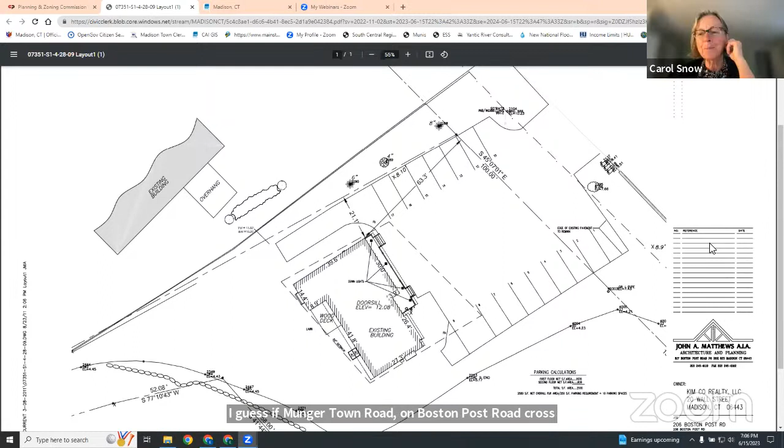Share your site plan. Is everyone familiar with where this particular property is located? Almost diagonally southeast of Mungertown Road on Boston Post Road, across from the car wash. Existing paving in the front and office building, with tidal wetlands at the rear of the property. Okay, so that's Boston Post Road to the upper right, correct? This is Boston Post Road here. Right, the car dealership would be up even further north across the street. Okay, and this is set back. There's one additional office building, and this is the shopping plaza, correct? Yes, next door, and this is the bank drive-through.

Do you need the plan up for your question, Kara? Sorry, no, I was just going to ask if Craig wanted to add anything more about the description of the building or the changes to the building or the land. Not really, it's everything, it would be done inside. I have two entrances currently, and that's going to remain the same. So there's really not much change that's going to take place.

So I'm going to put your floor plan up, Craig, and perhaps you can walk us through specifically what you're doing. You're before us for both a special exception and a coastal site plan application. The application was referred to DEEP for comments because of the coastal application. One question raised in the letter from DEEP was whether or not the renovations you were proposing would constitute a substantial improvement under the floodplain ordinance, requiring the entire structure to be brought into current flood compliance. I believe the current value of the structure is in the 200,000 range. Have you done a cost analysis of what your renovations will be?

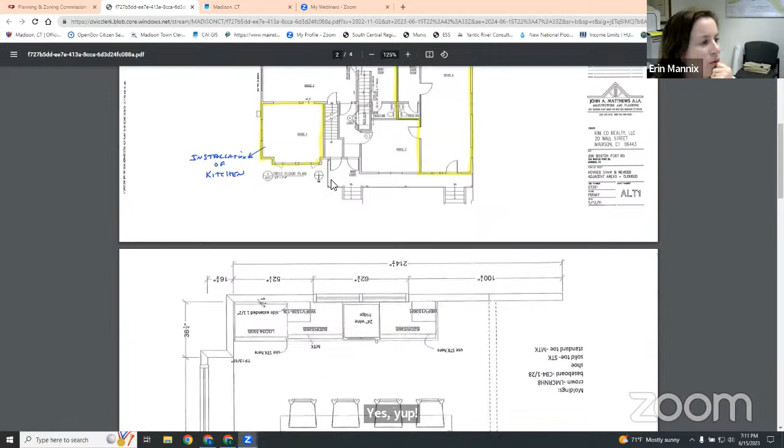So Erin, if you scroll down we'll see images too of the proposed kitchen—yes, this is just the layout of that one space of how the kitchen would be. And that's this room here. So this additional room here is part of the residence?

I'm using that for an office. Okay, so it's commercial use perhaps. Yes, perhaps a cleaner floor plan that can clearly show the commission which space is which, and a breakdown of that floor cost associated, just to verify that. Okay, I can do that.

The other points I wanted to raise were the need for a B100A application with the health department to verify, because it is a change of use, septic capacity and adequate reserve area. The second would be compliance with the building code and fire code for change of use, and whether there were separation requirements or sprinkler requirements. Has that been something you've reached out to those departments for? No, not at all.

I will. Aside from other questions the commission may raise, it would be my recommendation to gather that information and come back to the commission, just to make sure this is feasible under the parameters of the regulations.

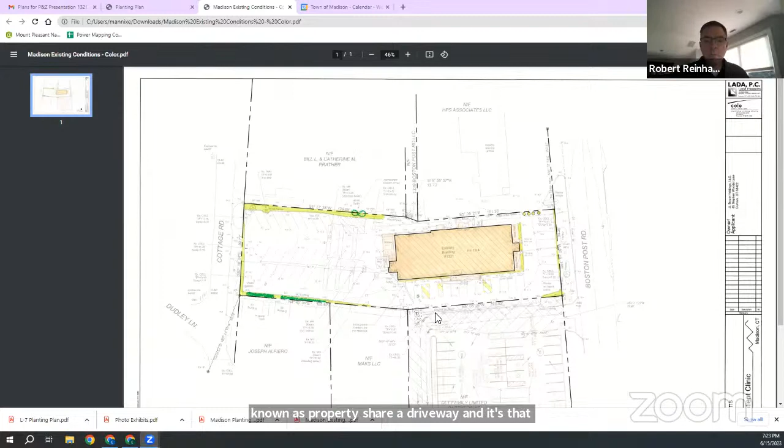When the property was originally developed in the mid-'80s, it was all subdivided out. This was part of the property that the Dunkin' Donuts is on. So those two properties, our property and the Dunkin' Donuts property, share a driveway. And it's that driveway right there. We have that all that cross hatching is an easement that is granted to this site for access over and across and through the Dunkin' Donuts site. And it's always been this way.

The proposal that we are making is to not change the building whatsoever. The building doesn't move. The building is fixed. We're not proposing any exterior changes to the building.

But what this plan does show is we have parking currently along the west side of the building. We have parking along the south side of the building, which is near the road. And there are two building entrances on that south side. That little projection that sticks off the building, that's currently an access that uses stairs, 3 steps to gain access to the door. And then on the west side of the building, right there where there's a light tan color, there is a main doorway and then a stair and a ramp that provides access.

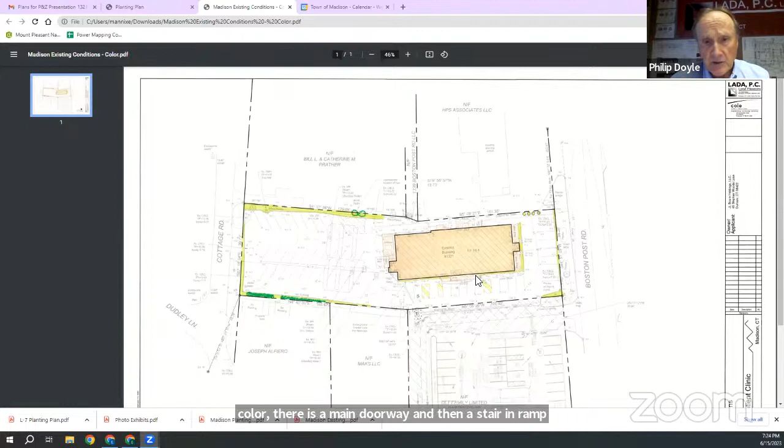The majority of the parking is to the rear of the site, and it's in the rear of the site where the septic system is located. There's about 48 parking spaces on the property. And ultimately, when we start talking about the site plan, we're proposing to reduce the amount of parking to 42 spaces. That's what would be necessary for this particular use, one parking space for every 250 square feet, equal to normal office use.

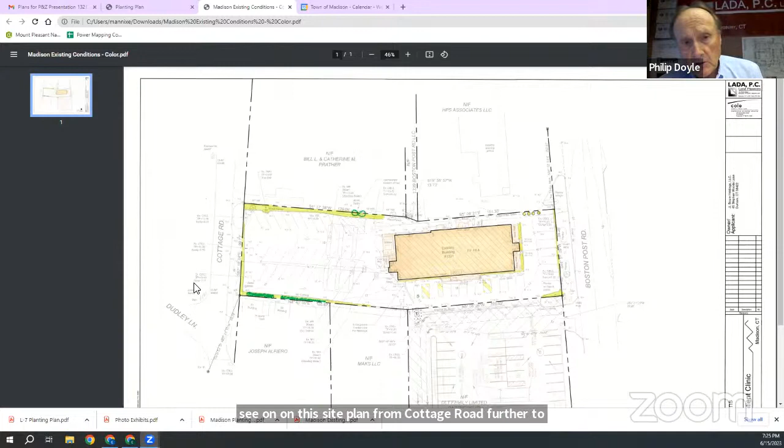The entire block, we were talking to the Community Advisory Committee the other night, and a question had come up about zoning in this area. And it's interesting, but this entire block is zoned C. Everything around us, all the properties that you can see on this site plan. From Cottage Road further to the north, all of the land in that area is zoned T, the transition zone. So this area has been used for business.

Currently, I would also mention there, it seems that there was at one point in the past light poles in the parking lot. Those look like they have been removed at some point. And the lighting that does happen on this property at the moment is all via floodlights that spread light wherever they are needed, mounted to the building.

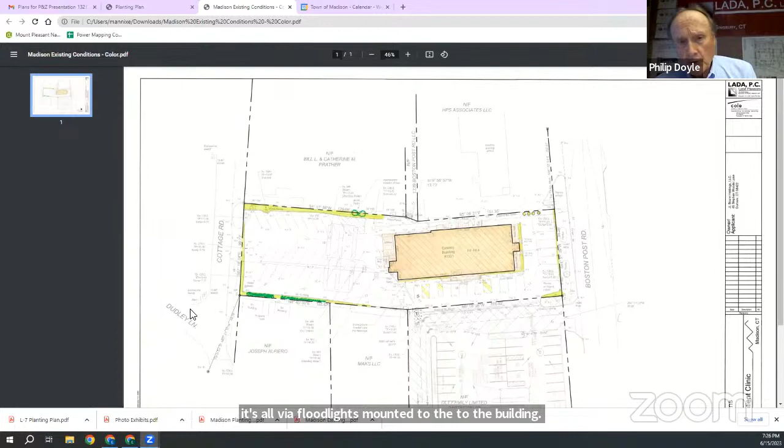Do you think you could flip to the proposed plan, Erin? Yes. Do you want the L7 planting plan? The colored one, yeah, the red color rendered one. Got it. Here we go.

Yeah, this gives you a good schematic picture of what we are proposing, we're trying to improve the site. The parking up towards the street would remain where it is. I'd like Jennifer to be able to explain her business in a couple of seconds, but before she did, I wanted to give you a brief picture of the property.

That southerly entrance that's toward Boston Post Road, that little nib that sticks out, that will be the entrance, if you approve this project, for cats, small animals. And the western entrance will be the entrance for dogs, keeping them separate.

Neither entrance at the moment has acceptable access for handicap. We are proposing, just to the left of your cursor, Erin, we are building a new handicap accessible ramp for the dog entrance. And towards the southern corner of the building, we'll be building a new ramp that does not exist to gain access for patients bringing cats in.

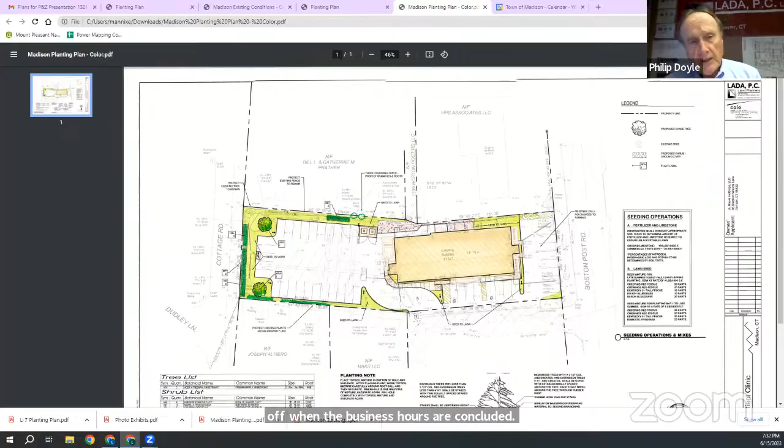But before I go any further, I think Jennifer should explain what she's doing.

We're asking for a special permit. There are certain conditions under section 615(5) for a veterinary outpatient clinic - the business has to be conducted entirely inside a building, all mechanical equipment enclosed so there's no noise from animal activity. Other conditions include no outside dog runs and no long-term boarding. We believe this application meets all of those conditions, but I think Jennifer should explain her intent.

Hi, nice to meet you all. I'm Dr. Jennifer Lansdowne from 1321 Boston Post Road. I'm co-owner of the building with my husband as JL Bore Holdings, and we're hoping to put into it an outpatient veterinary clinic that I co-own with Dr. Carolyn Gross, also a veterinarian - I'm a surgery specialist, she's a medicine specialist. Our goal with this facility is to run an outpatient clinic, open 8 a.m. to 6 p.m. We'll see emergencies of our own clients during those hours, but we have a very good relationship with Central Hospital for Veterinary Medicine, specifically the emergency clinic in Guilford.

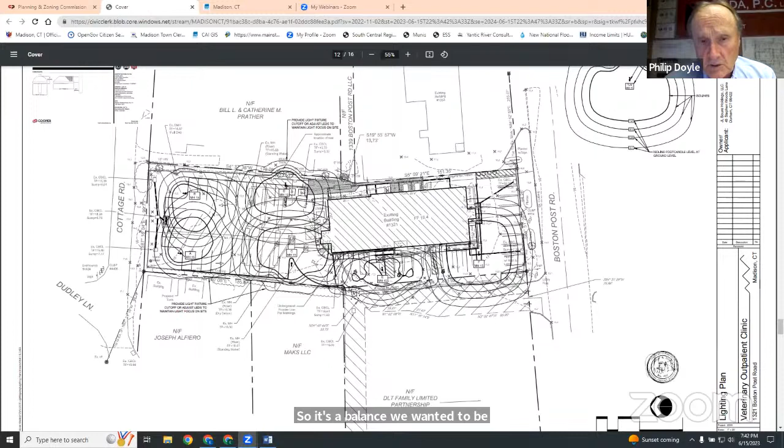So it's a balance. We want it to be safe, and we committed to the advisory committee that the lights would not be on after the close of business. If Jennifer's practice closes at 6, and she stays around till 7 or 7:30, I imagine at the latest the lights would be turned off, but the lights can all be set on timers. The issue is wintertime, right around Christmas, that's when it's darkest. So if the lights are off by 6:30 or 7, or at worst 7:30 or 8, that's the extreme case. This time of year, the lights would probably never come on.

My reaction is it's a concern - it's my thought. It's obviously been well addressed, and it's certainly... I know the property very well, and I think you've done a marvelous job improving the property, so I don't mean it as a negative thought. It's just that I know that area can be a real pain in the neck after the fact. It looks like you've addressed it, and I certainly would support that you have addressed it. If we can lower it to 12 feet, my answer is yeah, if we do more. But again, it's not a showstopper - it's just a comment that that's one of the areas, that much lighting in that back area. And I agree, floodlights are a pain in the neck because they just light up everything.

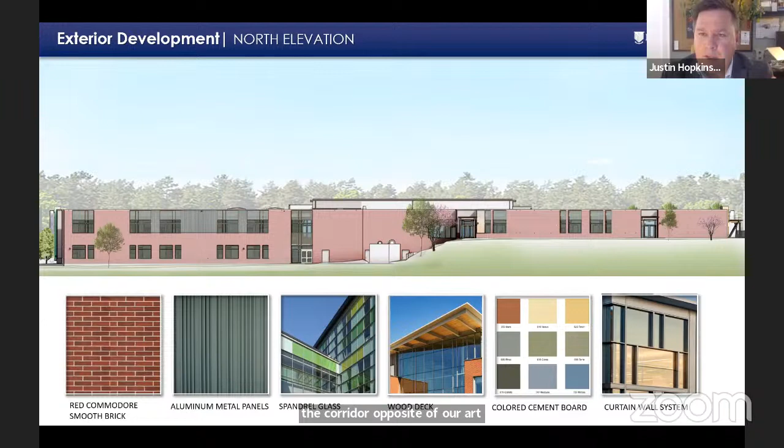The north elevation is basically on the other side of the building, where our parent pickup and drop-off would be. One distinction you'll see in the update for the next meeting is we're incorporating, per some comments from our building committee, glazing along the corridor opposite our art classroom to get in some indirect northern light, which is good for those particular places.

East elevation—this is the downslope elevation of the two-story space. Again primarily brick, where we're popping out some areas to accent the overall facade, with entrances at each learning community, as shown in the floor plan.

The west elevation is the kindergarten and pre-kindergarten area, directly adjacent to the playscape, with a similar architectural language. We will be providing exterior canopies near the playscape along the facade to provide additional shade and shelter for students in that area.

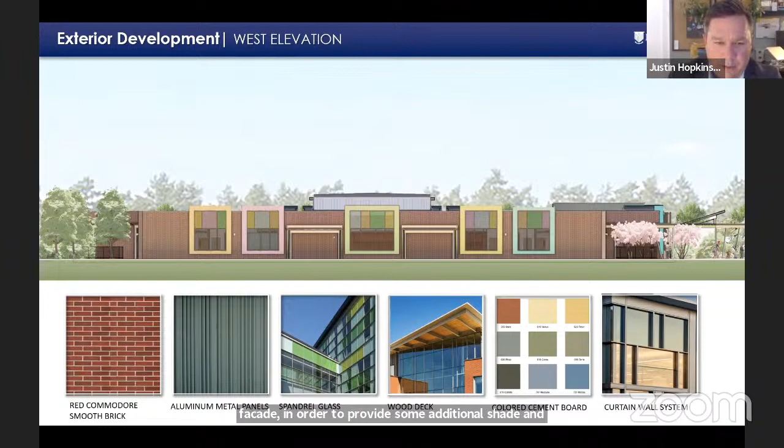This was one of our earlier renderings. The one item I want to highlight here is there has been considerable discussion of the canopy. We've had differing opinions on the nature of our entrance canopy, both with our partners at the building committee and during the presentation at ACA. We think we have a good solution that I'll go over in a moment.

This is at the downhill side, looking into the cafeteria. The main entrance is over to the left, on the uphill side near pickup and drop-off. This is another view from the uphill side, looking down to the two-story space.

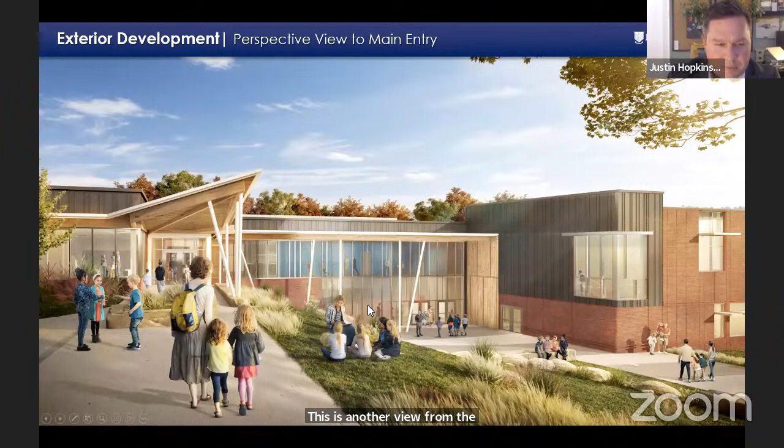This was a request from ACA, to show a rendering of the visual impact of the building from the street. This would be at the south entrance to the building. Another item I'd like to bring up is the sign, which was also a subject for discussion at ACA.

Overhead bird's-eye view showing how the volumes knit together here. You'll see the K and pre-K playscape over to the left, and the remainder of the building.

One thing I should mention—this is probably a good image to show it—in addition to the geothermal well field, we are providing the majority of our air handling units on the interior of the building. The purpose is to free up roof space to allow for a photovoltaic array on most of the roof. Without significant air handling units, condensing units, and similar equipment, we can use most of the roof, save for a couple of necessary vents for bathroom ventilation, etc. We can have the building be PV-ready as part of the building committee's ongoing work.

One of the things we're looking at, and will be vetting with the building committee at our meeting on Tuesday, and finalizing for our next session since this hearing will be continued to the July meeting. We intend to finalize this recommendation, bringing in some of the language. You may recognize some of the images at Hammonasset State Beach, drawing from the vernacular in town and using it as an homage in our structural systems for the canopy. We think this solution is a marriage of the two concerns and meets the intent of the ACA recommendation, while giving us a strong argument with our building committee partners. So stay tuned on that. We'd welcome any feedback or comments as we get into the comment section.

The other thing brought up at ACA: we had shown two monument signs at the main entrance to the building. This one represents what I believe is allowable per your signage regulations, and we also looked at a larger ground-mounted monument sign that incorporates some of the building materials. I believe it was a recommendation from ACA to pursue the larger sign and possibly seek a variance for the sign size.

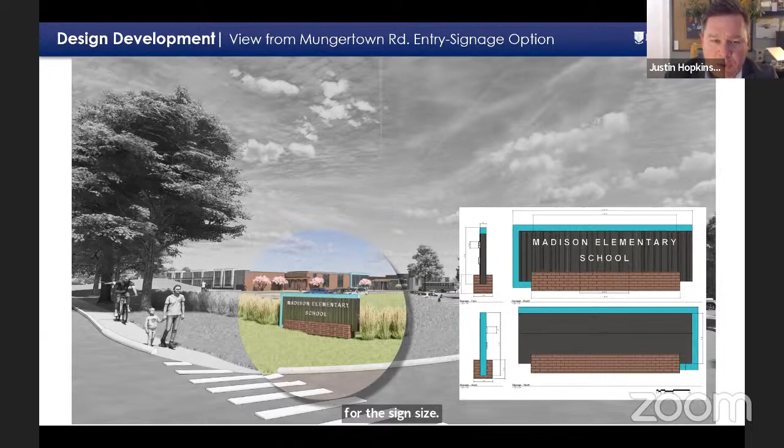With that, I believe that concludes the architectural portion of the presentation. I know we have a lot of speakers, so let me know, would you like us to take questions on this portion now, or get through the entire presentation and take questions at the end? I'd be happy to go through the entire presentation if other commissioners are okay with that. Okay, great, thank you.

So Will, I believe it's you. You're muted. It's his first Zoom meeting, so grant him a little clemency here.

Thanks, Justin. For the record, Wil Walter, professional engineer with Alfred Benesch & Company. How we're going to present the site: I'm going to go first and talk about some of the site layout, as well as stormwater, utilities, and erosion control. Then I'll turn it over to Ryan Dean, who's going to talk about landscaping and placemaking on site. After that, Chris Van Zanten, our professional traffic engineer, will talk about the traffic impacts as a part of this project. So with that, let me share my screen.

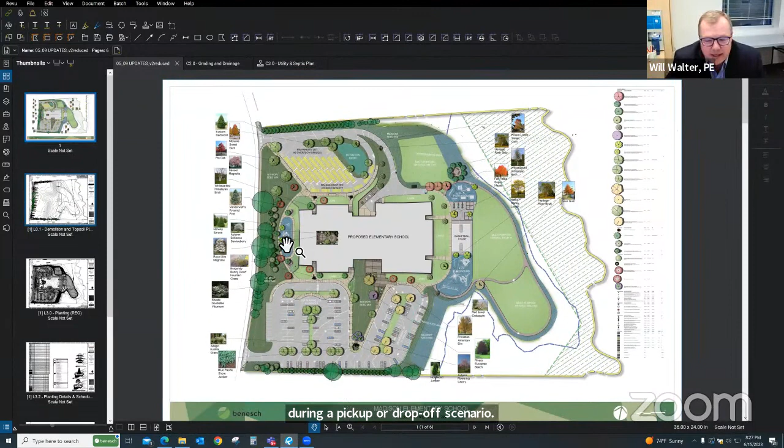Another important thing was parking. The building committee felt very strongly that we needed to maximize the parking. We need about 125 spaces for staff and visitors, but also for those few nights in the year with community events or school events. So what we're providing is 186 parking spaces down here, and as Justin mentioned, about 45 overflow spaces up here. So we've got around 230 spaces, significantly more than required on a daily basis, but additional spaces for those few times during the year that it's required.

The third thing that was very, very important was the parent queue space for drop-off and pickup.

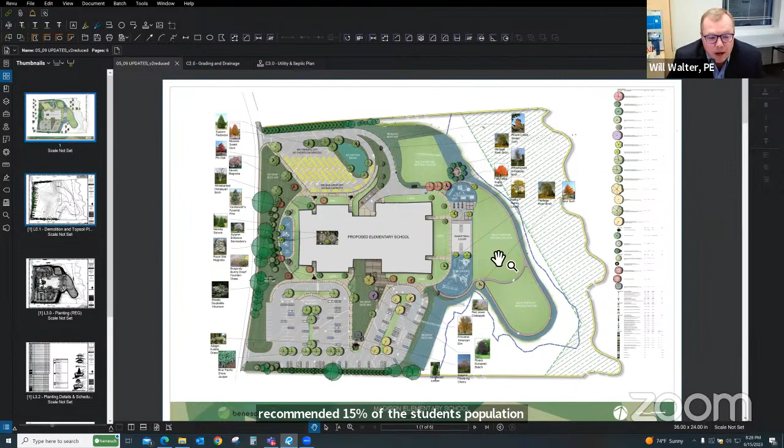One of the concerns of the neighbors was we really don't want to have buses, and we don't want to have cars backed up out here during pickup and drop-off. A previous traffic study was done, and they recommended 15% of the student population for parent queue, so that would be about 100 cars to be able to queue.

We did our own independent assessment, and Chris will get into this when he goes. We determined that you'll probably need about 90 spaces, but in terms of the amount of spaces that parents can queue up around, as well as the additional spaces they'll be able to park up here, we're providing 117 combined spaces. That's 17 more than was proposed by the previous traffic engineer and 27 more than we feel will be appropriate. We've worked very hard to maximize the amount of parent cars that can get into the site, and we're confident there's not going to be any cars backed up out here during those operations. Chris will speak more to that.

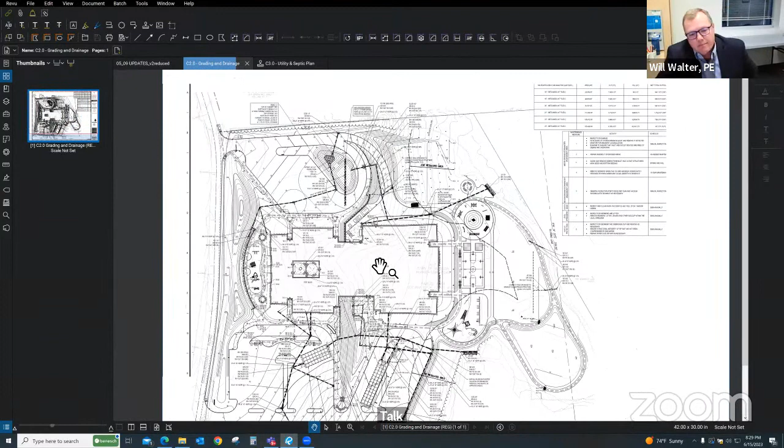I'll talk a little bit about grading and drainage. To the right down here is the Neck River, running north-south in the eastern portion of the property. There's wetlands associated with this, and we've presented before the Wetlands Commission, and we're going to go back before them again in July. But in addition to the wetlands, there's also a floodplain that comes down through here.

As a part of the local floodplain regulations, as well as the state floodplain regulations, we need to get through the local flood ordinance and flood management certificate, which is a state DEP permit. We have to set the finished floor elevation a foot above the 500-year floodplain, which means the lower side of the building is filling within the floodplain. We're required to do that by the regulations.

But the local and state regulations require that within the 500-year floodplain, we have to provide zero net fill. And not only zero net fill up to the 500, but for every incremental foot starting at the limit of our disturbance up to the floodplain, each of those 1-foot increments has to be zero net fill.

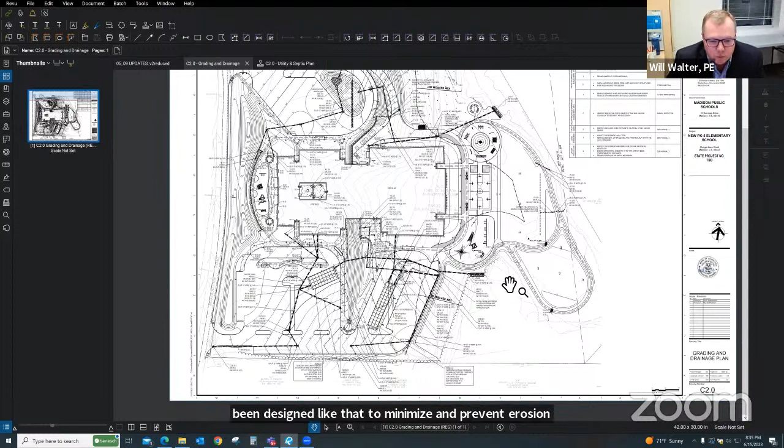The other thing I'll mention about the stormwater system is we have a large septic system up top that I'll get into in a second. But it was important that as part of that septic system design, we had underground infiltration, so that as the septic effluent slowly migrated down towards the wetlands, the stormwater would be infiltrating and helping to dilute the nitrogen concentration of that septic effluent.

So let me move right to that, and I'll talk about the utilities on site. The first thing I want to talk about is the water main extension. Under existing conditions, there are no public water mains out here.

What we're doing is we've designed about a half-mile water main extension. There's a water main up near the middle school, I believe, so we've worked with Connecticut Water. We've designed an extension of a 12-inch main all the way down Green Hill. It takes a left on Mungertown.

Originally, we were going to stop it right here, but the fire marshal is requiring us to put 2 fire hydrants on site, one up here and one way down by the southern entrance. Connecticut Water will not allow a fire protection lateral through the site, requiring that it come directly from the main. So we've had to extend the main down to here.

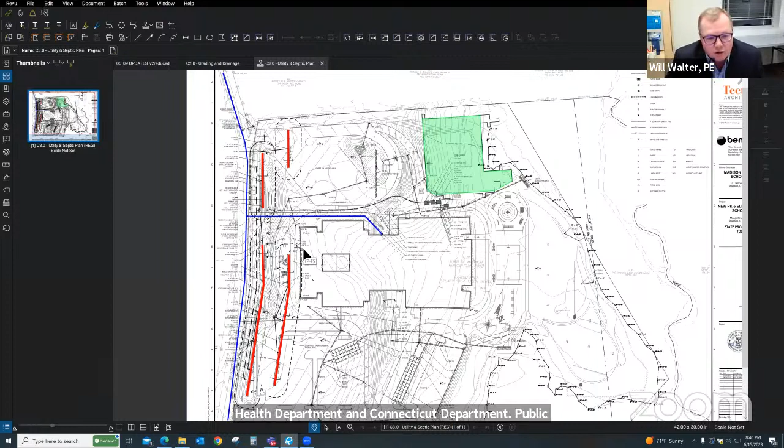We've been working on this design with the local health department and the Connecticut Department of Public Health. We were out there last fall, did test pits and perc tests. It's fully designed, and we've answered all the comments from the local health department. Now it's being reviewed by the Connecticut Department of Public Health — they were out there when we did the test pits. We've received their comments, which in my opinion are relatively minor. We've been revising the plans and anticipate submitting our revised design, which doesn't change anything you see here, probably Monday. I feel like we're very close to approval for the septic system from both the local health department and the Connecticut Department of Public Health, which will satisfy all the regulatory agencies that review the septic system.

So I know that's probably more information than you wanted, but I felt it was important to give you a sense of where we're at with that septic system. And that is going to conclude my presentation.

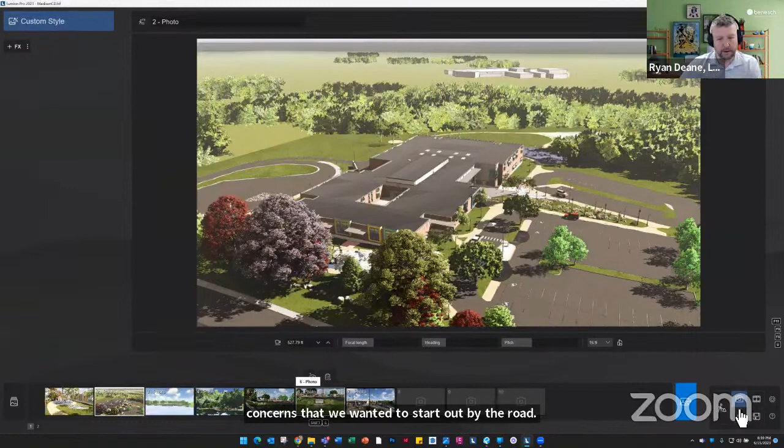One of the main concerns we wanted to start out by the road was what was going to happen with that buffer. Will just spoke about the sanitary line, but the biggest part of that was we're going to cut into a lot of the roots, so we were really diligent about trying to get as many trees saved as possible.

So we went out in the field and surveyed every individual tree, marked it for whether it survives or has to go, and from there we worked around that.

Within that area along the road, that's where we're housing the little guys' playground. The pre-K playground is nestled up next to the building, but there's a natural berm there that exists that we're going to keep.

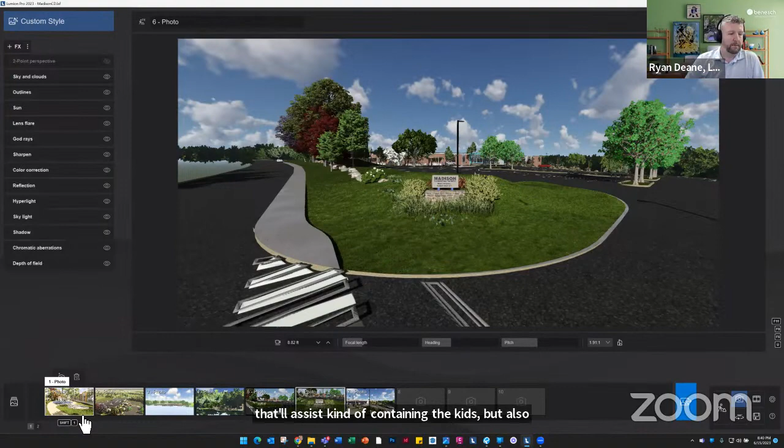I've got a great shot of it here, with some plantings that'll assist in containing the kids but also screening the views from the road. So this is that view, with the berm between the road and the playground. There's actually going to be a fence incorporated here. This is that building elevation shown earlier, but this is more of a run-and-play, natural feel, with lighter colors for the younger kids.

And then there's a darker palette of playground materials, which I can show you right now. So this is the...

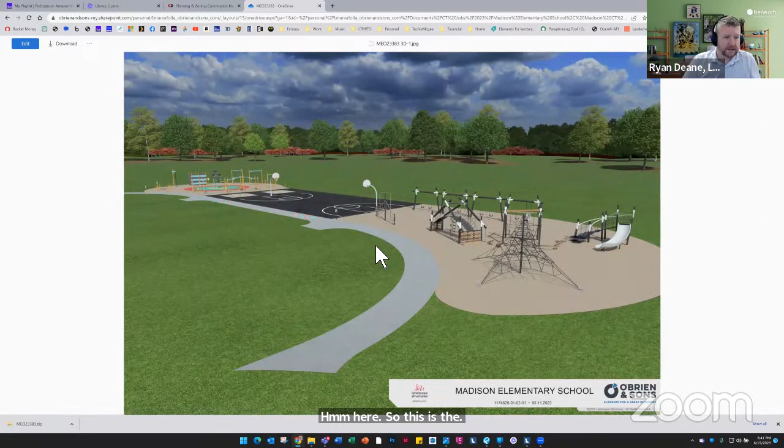Okay, so the upper school playground is broken into two portions. It's all newer playground equipment with a darker, more sleek scheme with a white pop, and there's going to be little elements of color within each of these. Some of the hardware we may change and make a little more fun.

But the alternate, moving a little bit further north, there's going to be a playground or basketball court with the ability to do Foursquare, things of that nature. As an add alternate, there's another playground area that could be added for kind of splitting the 1 through 5 children.

But the reality is there's plenty of play space through the fields. With the fields down to the south, to the southeast, we're going to have an upper field with more of a lawn.

Hopes to have that as the athletic field. Same with maybe the upper field area, but maybe the lower basin area could be more agrarian, mowed less often, with hopes to get some wildflower mixes in there.

Moving on, the other thing we're trying to do is reinforce that shoreline feel by adding some wood elements that are on the building as well, pulling that aesthetic up to the building with the pedestrian lights. These would be the little 3-footers along the pathways, and then throughout the periphery closer to the building would be these shepherd's hooks. And then out in the parking lots, something more efficient, an 18 to 24-foot height pole.

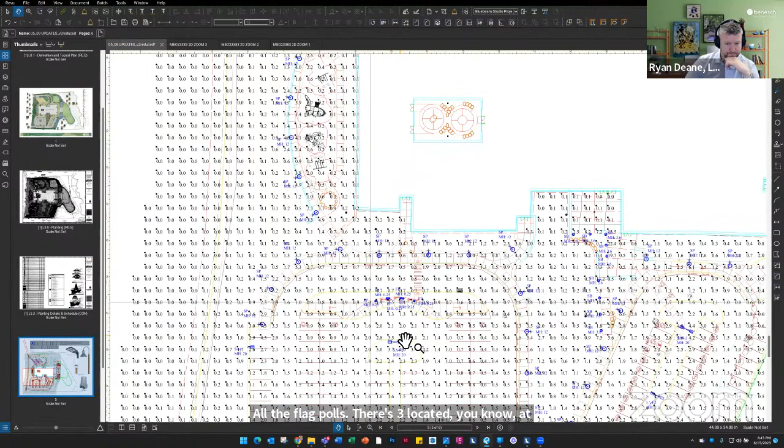All the flag poles, there's 3 located at the upper drop-off area. Those are all lit to the town standard flag lighting, downlit, just because of this pole topper you see on the corner of the screen here.

Beyond that, the plant list that we got into with the commission, very happy, there were only 2 or 3 plants that we deviated from. Again, these old green trees represent the existing buffer that's going to remain. It was harder to do with some of the lesser vegetation, we'll call it, there's a lot of disease stuff.

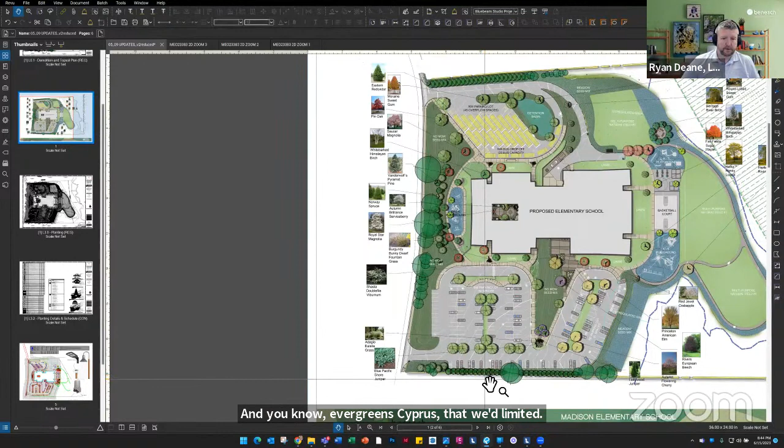So we're trying to replace that with hedgerows of evergreens and things of that nature that are all native. We've got eastern red cedar at the top. Previously we had a cypress that we omitted, and then at the bottom we've got more, I think it's more of the cedar.

And all sorts of different plants throughout, making sure that they've got winter interest for kids. Also that they're not going to be toxic plants - somebody's going to eat a berry and go right to the emergency room, that's not an option. So, also some maybe butterfly garden interest plants along this no-mow seed mix meadow.

Which has a real opportunity for pollination and learning opportunities for the kids. With that, there's an opportunity for this learning path that kind of roams throughout the lower portion of the site, connected to nature with outdoor classroom opportunities. We're just thinking stumps with rocks, a little bit of a canopy of trees, and a place for a class of 12 kids to sit and read, and just kind of get outside and explore.

I think with that, I've covered most of the site. If there's any questions, I'm happy to answer them. Thanks.

So Will, sorry, this is Justin from Tecton. Will, you mentioned you want to pick it up for traffic here?

Great, thanks Chris.

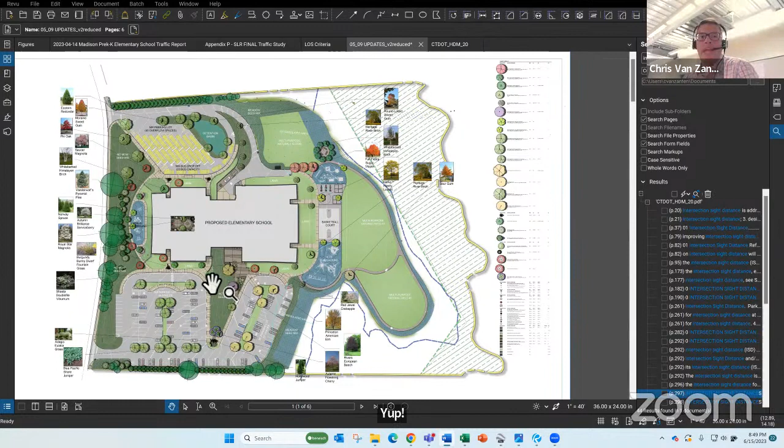So one of the first things we dug into when we got involved with the site planning is we took an independent review of the traffic study that was performed by SLR, dated January 13th, 2022. We dug into that, and based on feedback we got from other meetings, as well as based on the proximity of the existing school, the proximity of the intersection of Green Hill Road and Mungertown Road to the new school, as well as the existing schools, the Daniel Hand and Polson Middle School, we thought it appropriate to perform new counts at that intersection.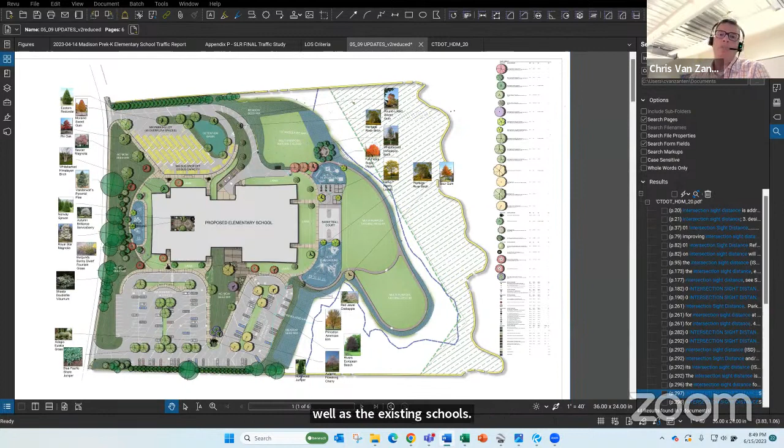And we went out there recently, March 21st, 2023, and performed traffic counts during the morning peak and the afternoon peak. One of the key findings we got from that is those were check counts that we wanted to use to verify the data that was collected by the SLR study.

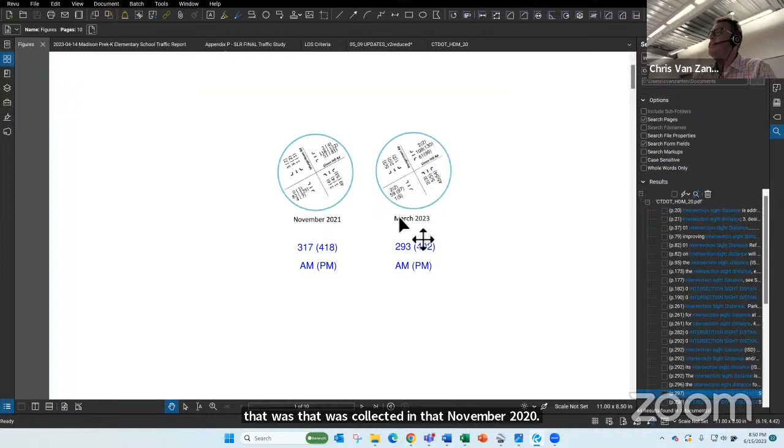So the first thing we did was compare the data collected in that November 2021 study to the data we collected on March 21st. And basically what we found was that the peak hour, the peak hour of the elementary school, which is 8 to 9, the volumes were actually lower in March 2023 than those collected in November 2021.

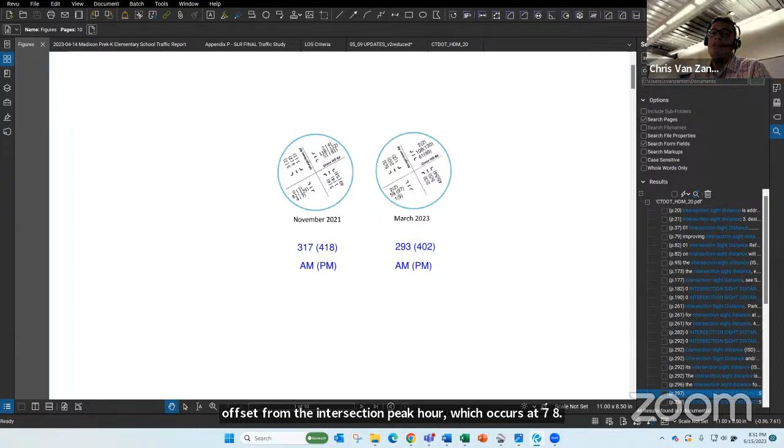What we also found from those counts was that the elementary school peak hour, which is 8 to 9, is offset from the intersection peak hour, which occurs at 7 to 8. So there's approximately 190 vehicles less at that intersection between 8 to 9 than compared to the 7 to 8 hour.

Here's just a quick comparison, you can see this is just a screenshot from our latest data, and this is from the study, the latest peak from 8 to 9. So you can see we're much lower between 8 to 9, 317 vehicles through the intersection compared to the 507 at the 7 to 8 hour.

So based on that, we looked at the analysis that SLR did, the Synchro analysis, capacity analysis, and found everything that they did was appropriate for the analysis, and the capacity analysis summary that they presented in their report is appropriate. So what we're seeing is basically A's and B's at that intersection.

The northbound approach will operate with a level of service B during the morning with the project, and a level of service B in the afternoon with the project. The southbound approach will also operate at a B. Eastbound left and westbound left, which need to be made across through free-flowing movements, operate at level of service A. That was good news there.

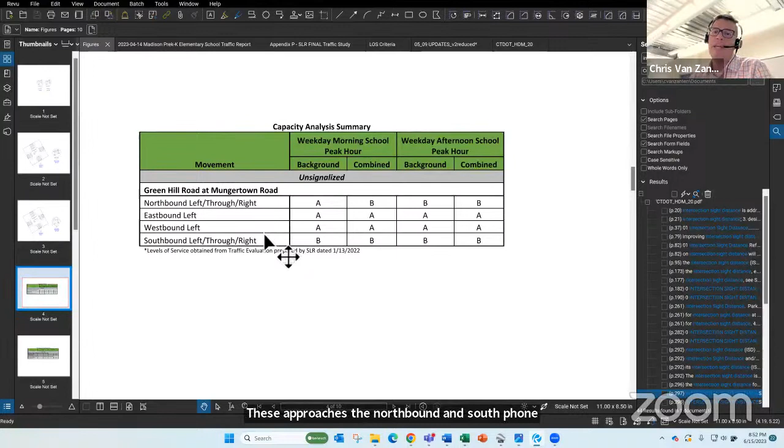The additional delay at these approaches, the northbound and southbound approach, is only 3 seconds additional delay per vehicle, with a maximum queue of one vehicle in the southbound and 2 vehicles in the northbound direction. So not just at the intersection, we took another hard look at the entire study that SLR presented, and we found the analysis to be representative of the conditions we could expect both with and without the project in the background and build condition.

Chris, this is Justin. Do you mind if I jump in here? Not for everybody that may be watching the meeting, can you describe what an A and B condition is? Sure.

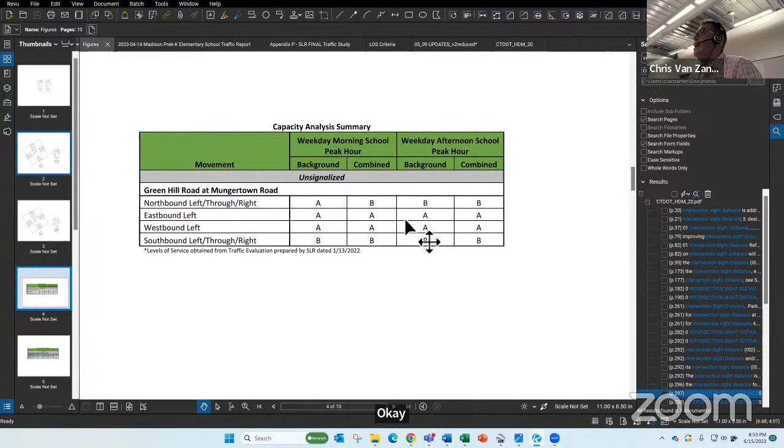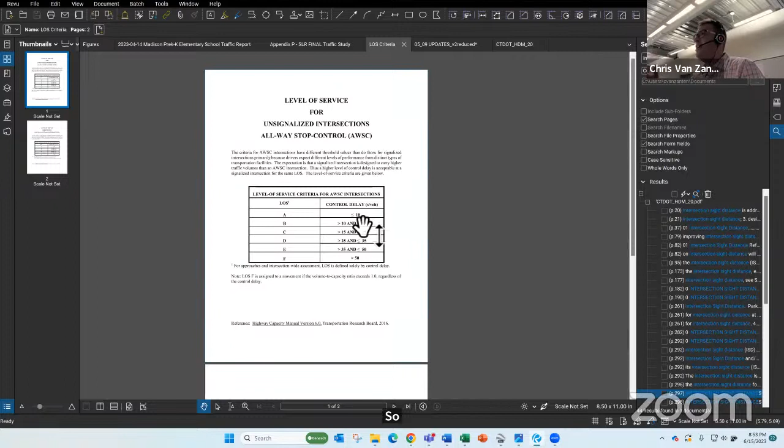Level of service A is basically the best you can get. It's minimal delays at the approach. There's criteria that the Institute of Transportation Engineers and the Highway Capacity Manual have. Basically, a level of service A represents less than or equal to 10 seconds of delay per vehicle at that approach. So if traffic's moving and there's no delays, you're at an A. B's, you're getting a little more delay, between 10 and 15 seconds of delay per vehicle at a stop control.

You can see here what the various delays are and what they correspond to letter-wise. It's basically very similar to the grading scale we have in school—A's are good and F's are not so good. So that's the short of it there.

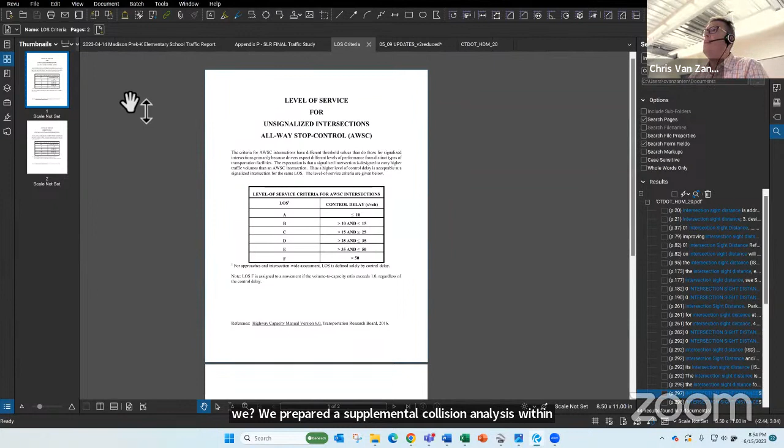Another thing we did as part of our study is we prepared a supplemental collision analysis within the study area. The SLR report focused on several of the intersections within the study area, basically along Mungertown Road, along Green Hill Road, up to about Copse Road, and there were 22 crashes within the period between the 1st of January 2019 through the 6th of January 2022.

So what we wanted to do is expand that analysis for the latest data available through the UConn Crash Repository. We expanded it to include January 7th, 2022, picking up right where the SLR study left off, and a full year later. Within that timeframe, there were 7 additional collisions.

All those collisions were property damage only. There were no injuries reported. There were 3 crashes along Green Hill Road between Warpas and Copse Road, and each of those crashes occurred at a different location and a different cause. There were 2 run-off-the-road crashes at different locations and then one rear end at a driveway.

So we didn't see any new trends or anything there as part of our new analysis. The rest of the remaining 4 crashes were spread out throughout the study area. So there's no recommendation for traffic lights needed at this particular proposed location.

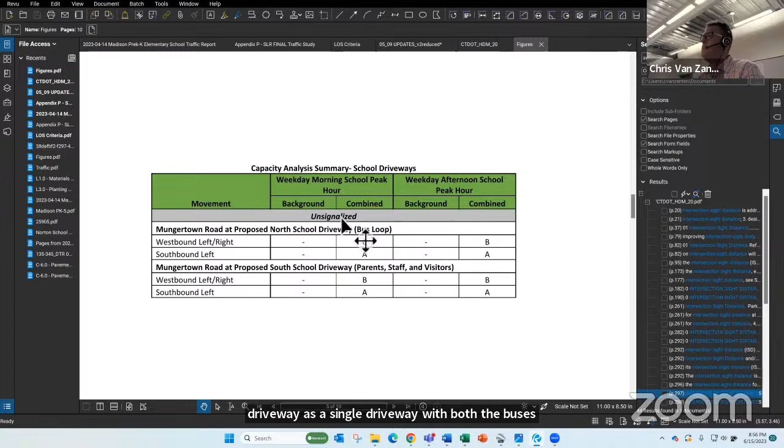That's correct. Yes. Okay. And also, as part of this analysis, we also looked at—the SLR report had analyzed the proposed school driveway as a single driveway with both the buses and the parents and staff all using the same driveway. So we wanted to make sure we were capturing what we're doing here.

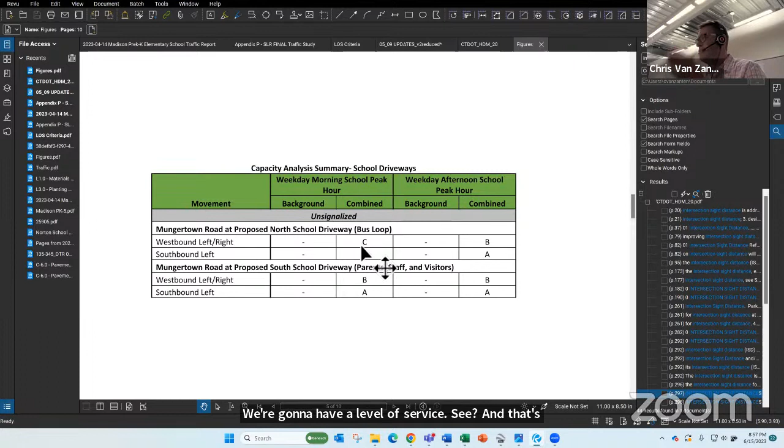So we basically broke up, we analyzed the bus driveway and then the parent staff visitor driveway. Here you can see the levels of service that we're seeing at the bus loop. In the morning, we're going to have a level of service C, and that's primarily because we've got a lot of heavy vehicles. It's pretty much exclusively buses, which have a little bit harder time accelerating and finding gaps, so there's going to be a little bit more delay there.

But the turns into the site from Mungertown Road for those buses will operate at a level of service A, with minimal queuing, less than one vehicle. There's a lot of room, there's a lot of gaps available for traffic to cross Mungertown and enter into the site, making a left turn.

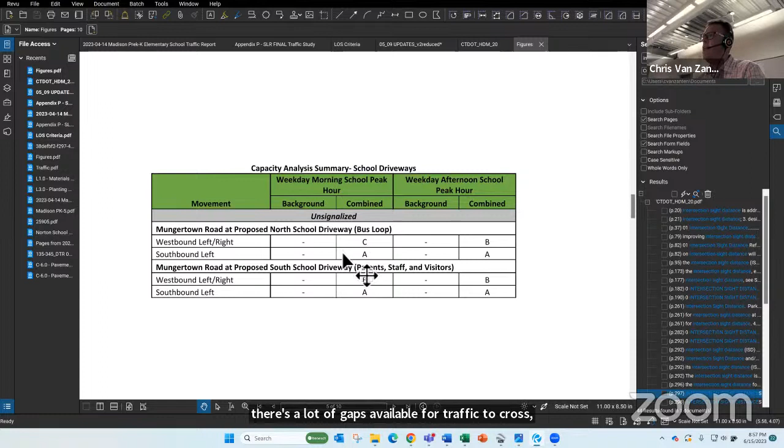We also took a look at the intersection to the south, the proposed south driveway, where the parents, staff, and visitors will enter. There we found that the southbound left turn into the site will operate at a level of service A, again with minimal queuing, less than one car. The traffic heading out will operate at a level of service B, with a maximum queue of about 2 to 3 vehicles during those peak periods during peak morning pickup and drop off.

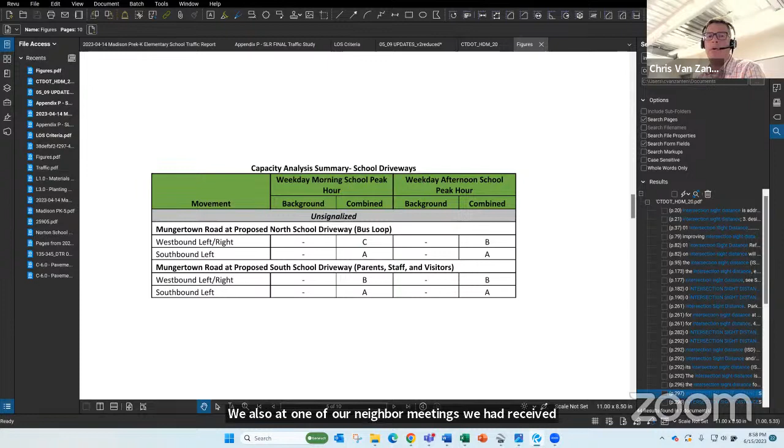We also, at one of our neighbor meetings, received comments from a neighbor across the street at 181 Mungertown Road. I'll bring that up here. They were requesting that we look at potentially offsetting our proposed driveway with their proposed driveway.

We took a really hard look at that, and we understand what they're looking at there, and we want to make sure everything's good. But we didn't move forward with that, because number one, it's always preferable from an access management standpoint to align driveways across from each other. You get the drivers looking at each other. There's tons of guidance out there for traffic engineers. There's the NCHRP 659 that talks about geometric design of driveways, and a number of other access management manuals, and this is the standard practice when we have this situation, is to line those driveways up.

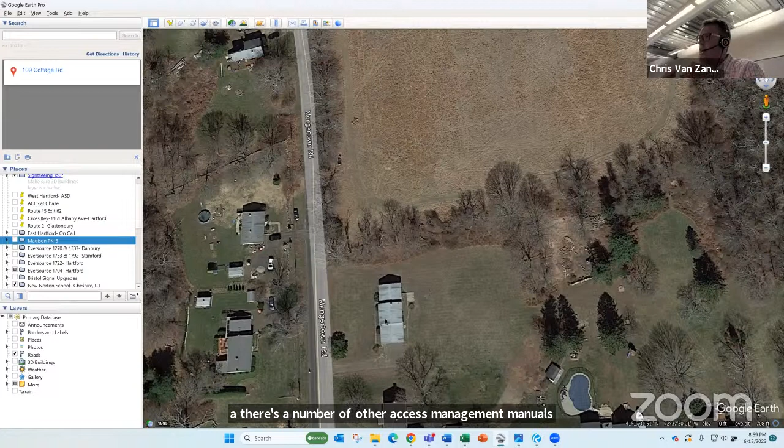Another thing that factored into that decision to not relocate that driveway was that if we move that driveway up, we had concerns that the headlights, during an evening period, an evening event, would shine right into that house. So we really didn't want that to be a nuisance there as well.

And then lastly, we actually took a look at the operations at this intersection. If vehicles were to take a left turn out of that driveway during the peak hour, there would still be minimal queuing and minimal delay for the residents at this residence.

We analyzed the existing driveway, which operates at the threshold right between an A and a B, at 9.6 seconds. With our school there, that level of service will go to a level of service C, which is still acceptable, but with just an additional 7 seconds of delay at that intersection. And aligning that makes it much safer, so we thought that was the most important thing, the safety here.

And then as I mentioned earlier, the southbound lefts into the site will be minimal. There's plenty of gaps for traffic to make a left across the opposing traffic stream here. So we did take a hard look at this, and we feel that the best design is what we're showing, and most appropriate.

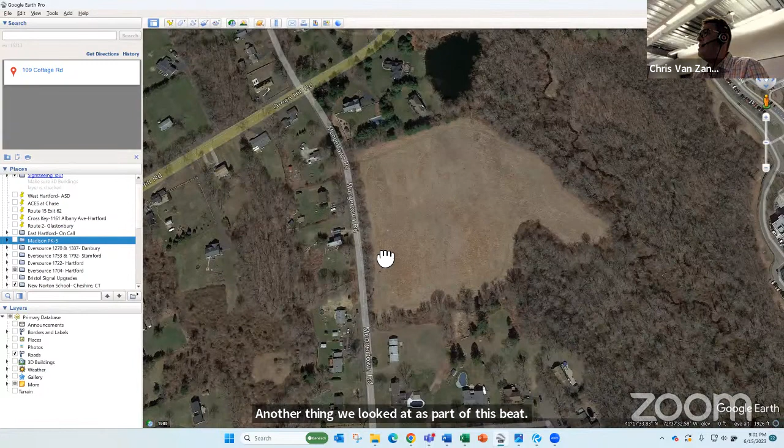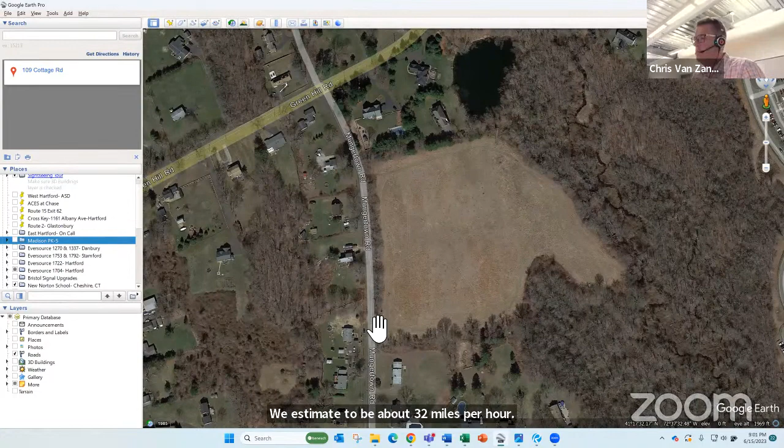Another thing we looked at as part of this, now that we have driveway locations, is the intersection sight distance out on Mungertown Road. We have our one driveway up here for the buses, and another driveway down here. The prevailing speeds out there we estimate to be about 32 miles per hour, that's your 85th percentile speed. So that requirement is about a 357-foot sight line. We have well in excess of that, we're looking around 600 feet when measured 15 feet back.

There is some opportunity for... let me step back. This driveway will have slightly less than the 357, and the only reason for that is that we're limited by the intersection here. All traffic that's making a left or a right onto here will have to slow down, so actually the sight line considerations here are less. They're not the 32 miles per hour because vehicles will just be accelerating at this point, so it'll be a lower 85th percentile at this location.

So we felt that driveway location appropriate. There is some opportunity for some minor tree trimming here - there's some evergreens over on the east side of Mungertown Road. That would be within the right of way. We think there's not going to be any issue there, and it will only improve the sight lines there.

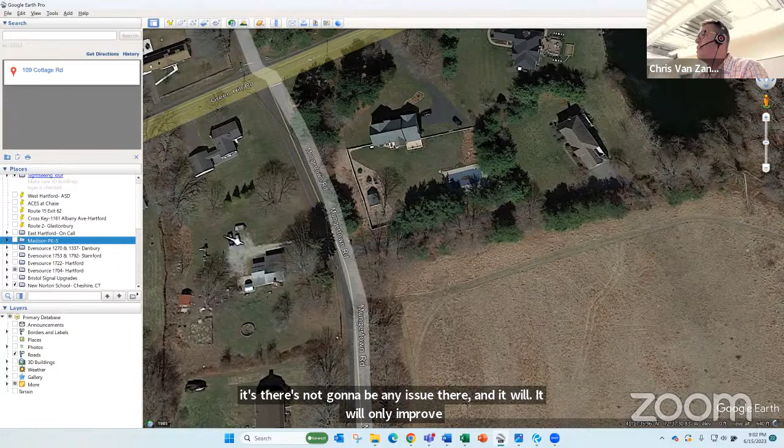Following up on what Will talked about, I just wanted to touch base a little bit more on the site plan. We performed, what we did is we also wanted to - SLR in their study, they went out and observed the traffic operations at Jeffrey Elementary, located on Copse Road. We wanted to do the same thing.

We wanted to see how, if anything, coming out of the pandemic, if there's been any kind of changes out there with bus ridership and parent pickup. I have seen a little bit - I'm working on a bunch of schools right now, but we have seen a downward trend in the number of parents. Parents are starting to put their kids on the bus a little bit more. It is community by community, but some communities are seeing that reduced parent drop off and pickup.

So we wanted to just kind of see it firsthand. We didn't want to take what they said without looking at it. So we were out there on March 16th as well as March 21st during the AM and PM peaks, peak drop off and pickup periods.

And when we were out there, we actually saw a max demand. Basically, the max demand occurs in the evening, in the afternoon pickup, with a max demand of 39 vehicles during that afternoon pickup. And that's actually less than what SLR saw - they saw 50, a couple years before.

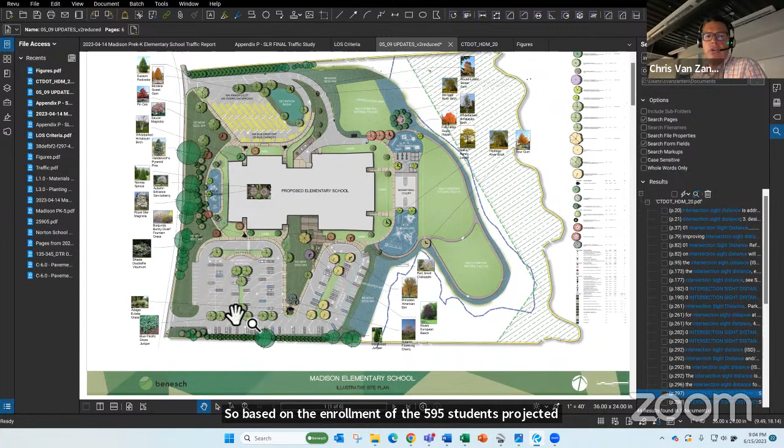So that's where they got that 15% of the enrollment number. They took that max demand, that 50, divided by the 325 - that equals 15%. What we saw, 39 divided by the 325, we saw 12%. So we said, let's stick with the 15 - that gives us a little bit of flexibility and ability to absorb any kind of fluctuations that may happen out there. So based on the enrollment of 595 students projected for the school, we saw the minimum, the 15% of the enrollment.

That would be 90 spaces for parent pickup and drop off. So as Will mentioned, we have 117 spaces when you take in the excess parking that we're proposing in excess of the staff parking - the 125 spaces for staff and visitors - and then also the queuing along through the lots, providing on-site queuing potential there.

So it's about 1,200 feet of queuing space, which correlates to about 60 queued spaces for parents. And one other thing that Will and we didn't mention was that at Jeffrey School, there's only basically room for four parents to queue and let their children out or to pick up their children during the pickup operations. And granted, at Jeffrey, the pickup is you park and then you go get your child, but that may change here.

We have a lot more room to process children, to get them, and parents can line up along the sidewalk and be able to process more cars than at Jeffrey. So you're going to get cars in there - they're not going to be sitting there as long as what you're seeing at Jeffrey, and there's plenty more space there.

And then just lastly, I would say that the addition of the sidewalk along the frontage is a great addition. It's definitely the great first step in kind of an initiative - the initiative for the safe routes to school and complete streets here in the town. And we're seeing it at a lot of schools where students are walking more, and it's a great first step here. I just wanted to highlight that.

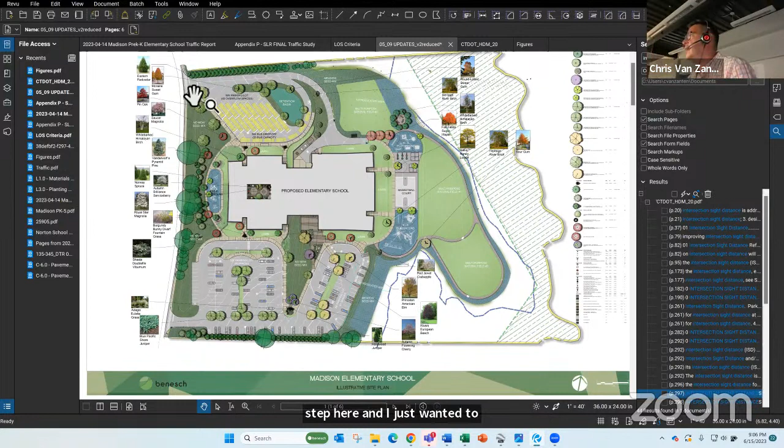So with that, I'm going to turn it back over to Will, and we can answer some questions. Thank you - yeah, and I think that wraps up Benesch's presentation. So with that, I'll turn it back to Justin or Graham.

Thank you, Will. Graham, I don't know if you want to bring it home or. No, I just appreciate the very detailed presentation, and we look forward to any comments by the commission and hearing the public if anyone wants to speak.

Great, had a question - thank you. Yeah, Michael, I didn't see anything about fencing towards the conservation land. I assume there is some kind. Could you show it on the map where it is and how it is?

Fencing down by the wetlands? Yeah, I don't suspect we'll have a problem like Disney had with the gators coming out from the water, but I mean, you have conservation land out there, and I wouldn't want kids wandering off into that area.

Ryan, you can speak. I don't believe we've proposed any fencing down there. We want to be able to not have the kids maybe walking... it's not needed, maybe it's not needed. It's typically more disturbance than it's worth to put something substantial in. So you're going to be drilling or digging a post hole every 8 feet? They don't typically do it. So maybe some signage if you're not trying to disturb it, marking the trees to show the conservation area, but nothing to restrict kids from going out there at all.

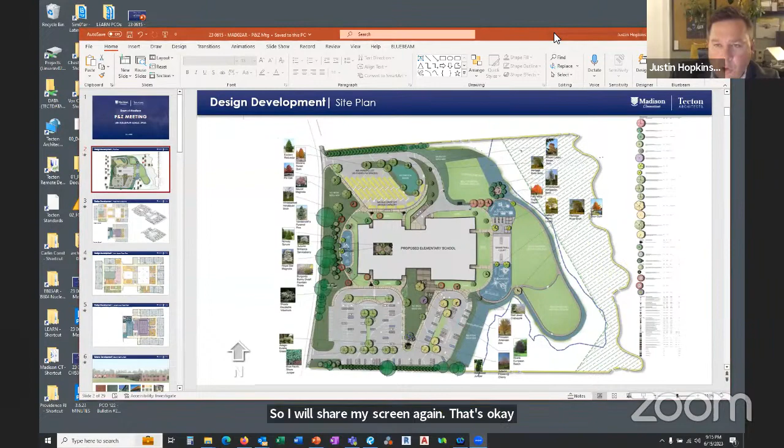I think I can address both of those, and it would be my responsibility to have made that a little bit more clear in the presentation. So I will share my screen again. Okay, everybody can see my screen, right? Yes.

So the area to the east of the site, these are multi-purpose fields. You're right that where we have our playscapes, these are more formal playscapes. By their very nature they're fenced in, because sometimes these kids like to run, so we need a point of control for the faculty when students, especially the youngest, are playing in that fenced-in area. The whole area to the east is open green space, maintained as a lawn, more or less, and separated into two multi-purpose fields. We haven't shown any line striping because these aren't formal fields—the concept is that this is the free play zone. So that's item number one.

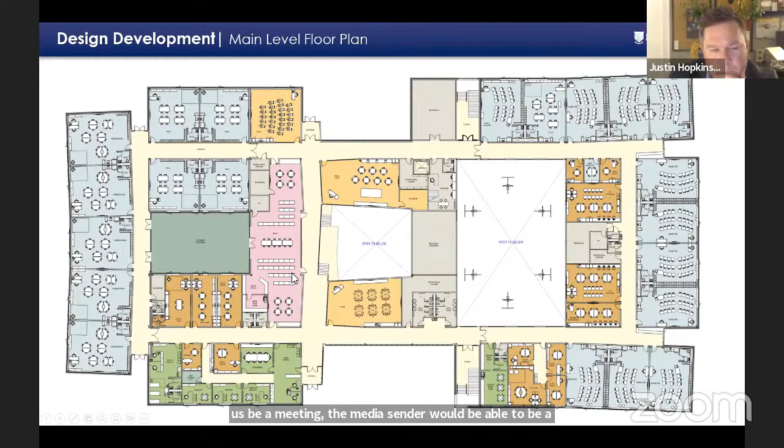One thing we've worked hard on in our organization is the ability to shut down the curriculum areas of the building so that during presentations, the gym and cafeteria can be open to the public. With respect to meetings—say PTO meetings or a BOE meeting—the media center would be able to serve as a place for that kind of more formal agency meeting, that non-presentation type of meeting. So I don't know if that answered your direct question, but it certainly was something I likely glossed over in the presentation. My apologies for that.

One of the things the Board of Education does when starting a building project like this is develop an ed spec of all the spaces they need and want, and our task as a building committee is to implement that program. We clearly did not want to eliminate program like we were forced to at the high school, which was a major budget bust. So we're requesting some additional money from the town to move money around so we don't have that same problem. Hopefully when it comes time to vote for additional funding, we'll get your vote.

Thanks. Any other questions from commissioners? Aaron, I can't see anymore if we have participants.

If we want to spend a little time for the public to ask questions, I think that would be a good idea, in case any questions come up tonight that would give the applicant an opportunity to address before returning at your next meeting. So let's open it up for public comments now—just raise your hand, we'll call on you, and you can identify yourself for the record.

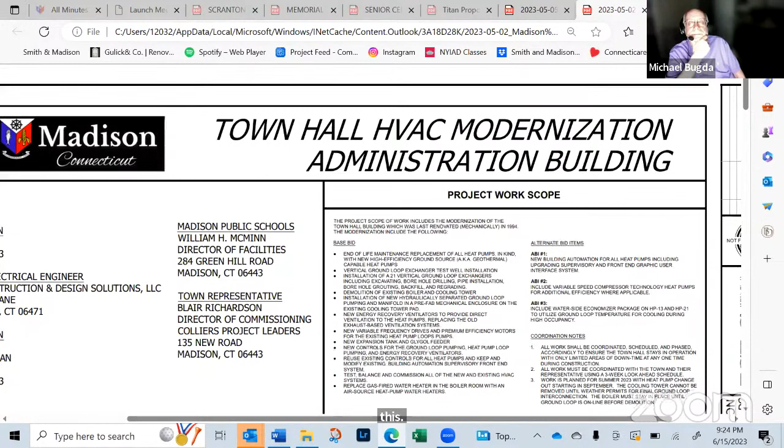Let's see. Hold on, let me find it. Apologies. Okay, so the geothermal—let me know if you could see this. Yes, we can. There it is, it's a fairly straightforward application.

This is at the Town Hall Administration Building. In the back, the Arts Barn is here, this is the parking lot, just to orient yourself, and the police station would be up over here. It's the insertion of 21 geothermal wells into that treed area near the lot, and then converting what is currently a cooling tower into the command center for that. It's already a fenced-in area, so the only change you'll see is about a foot over the fenced-in area—you'll see the top of the new building. All of these trees will remain as much as possible during the work.

Trees and scrub will be removed to access areas for drilling and boring, but trees will remain as much as possible. The refuse will be ground into chips for a 4-inch mulch for weed suppression. Once installed, there will be nothing above ground visible aside from the trees and mulch.

I wanted to draw your attention to the Geo Exchange pump house you'll see, just the foot of the pump house. It's a prefab metal building sticking out. The existing fencing will remain; we're just replacing the building currently inside it with the pump house. It is currently a cooling tower.

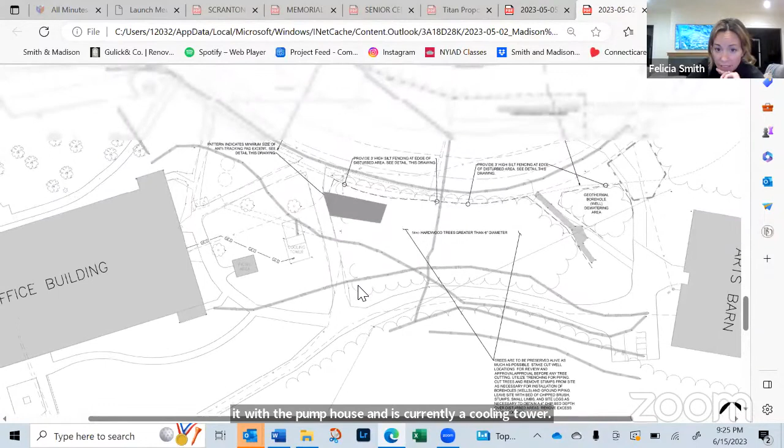There is also an erosion control plan. This site is beyond the 100 feet of the inland wetlands area down to here, but there is extensive erosion control protection, anti-tracking pads, silt fencing, a dewatering area, and all of the standard applications for that type of area for the bale zone and sedimentation. Hopefully that was brief, trying to keep this short, but that's a general overview of the project.

So this only supplies heating and cooling for the main admin building? I believe so, yes. So the police department is on their own to do something else separately at some point, I would imagine. Yes, if they choose to.

I just want to pick up on where Felicia left off. The town did go before ACA for comments, really just as a formality. As part of the application process, there were no additional recommendations from the committee, and that was just a favorable recommendation to move forward to the commission.

How deep do they have to go on these wells? Quite deep. I'm not quite sure off the top of my head, but depending on the water table, it can be a couple hundred feet or so. 500 feet, yep, approximately 500 feet is the depth.

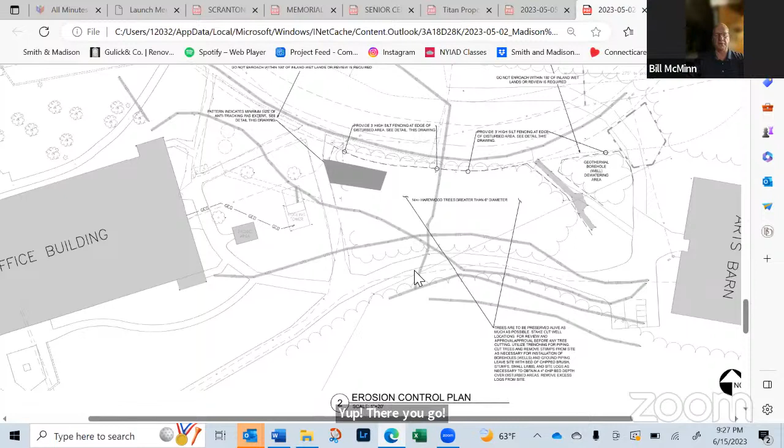I think one of the most immediate concerns, more of a logistics issue during construction activities, is managing both pedestrian and vehicular access during construction. This includes pedestrian access to the existing office buildings, as there is an employee entrance on the north side, and also pedestrian, emergency, and ADA accessibility to the arts barn during construction, so Bill would have to synchronize that.

Additionally, as this project has moved out of the 100-foot upland review area, the original proposal was to put the wells within the existing parking lot area, so this is a revised location.

Detail needs to be taken during the dewatering process. It can be quite a messy process with drilling, spoils, and dewatering, so that entire process needs to be well monitored and kept outside the 100-foot upland review area, and not interfere with pedestrian access, since the dewatering area is located just to the south of the existing pedestrian walkway to the arts barn. That's staff's comments, and I had no other comments beyond that.

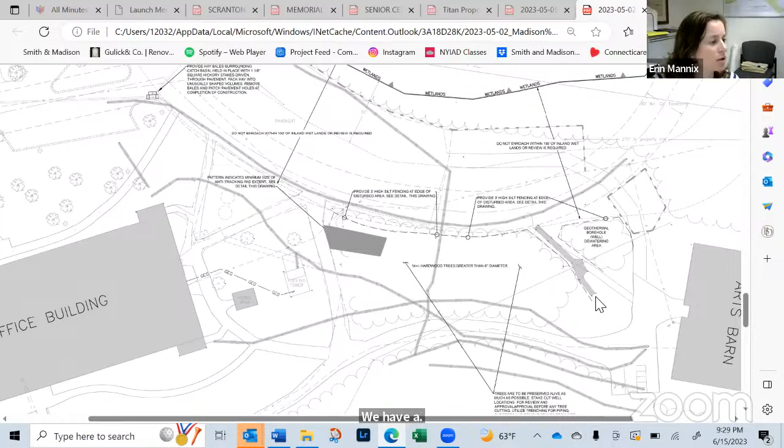Did you want to share any more of your report? I think Felicia pretty much covered it. It's a fairly straightforward proposal, and I did share my staff comments with both Felicia and Will earlier today with potential conditions, so I think that's reasonable to work with.

Any other comments or questions? If not, could I have a motion to approve with conditions as per the staff report? Motion to approve, Carol. Thank you, and a second. Second. Any further discussion? All in favor? Great, it's approved. Thank you.

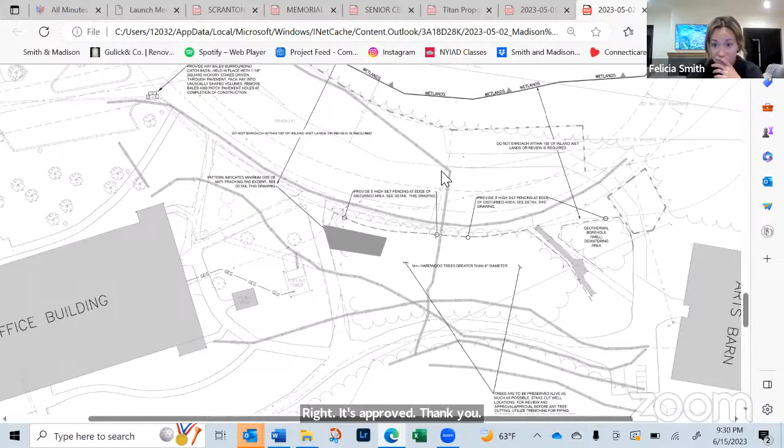Sorry, yeah, we could just jump to Sampson if you'd like. Yeah, that'd be great.

The next proposal is for 3 separate locations for electric vehicle juice bar charging ports. Before going into each location and layout, I wanted to show what they will look like. This is a different provider than what is currently in the town behind the post office area, but the same general concept.

Each port can provide enough electricity to charge 2 electric vehicles. It will be metered and will be a chargeable rate, and the income will go back to the town for the operation of it.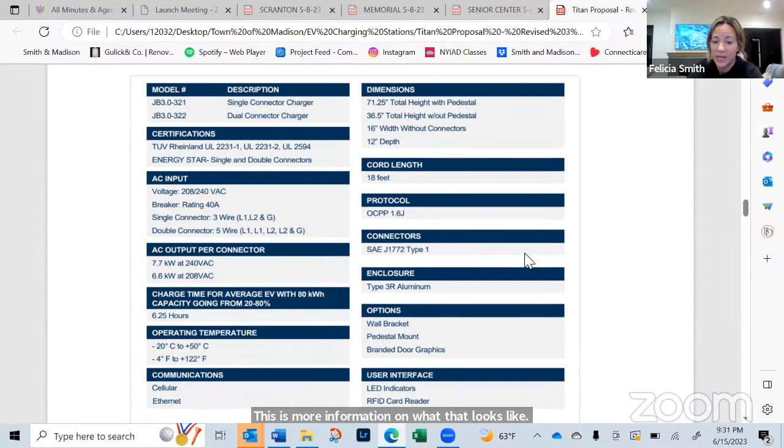This is more information on what that looks like. These are in use around various municipalities in the state of Connecticut. This is the general specifications for it.

This is what a typical spacing layout will look like if you were to do 2 dual ports, 2 charging ports with 4 parking spaces. They will be striped and marked. It won't be fully green, but it will be stenciled in, so it will be very clear.

It is reserved for electric vehicle charging. There will be 1 ADA accessible parking space for each of the locations. In one of the locations, I believe it requires removing an existing parking space to make sure there's enough space for ADA compliance, and I can bring that up. So we'll start with the senior center, since this is just the Titan proposal.

So right now, as you can see... Actually, I'm sorry to interrupt you, Felicia.

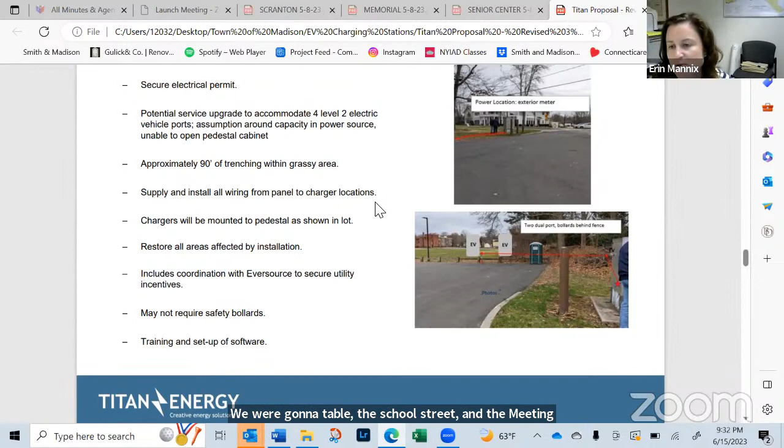We were going to table the School Street and the Meeting House Lane EV chargers because of the need for historic district review. So we were just going to handle the Scranton location tonight, if that's agreeable. No, yes, okay, so I will move down to Scranton.

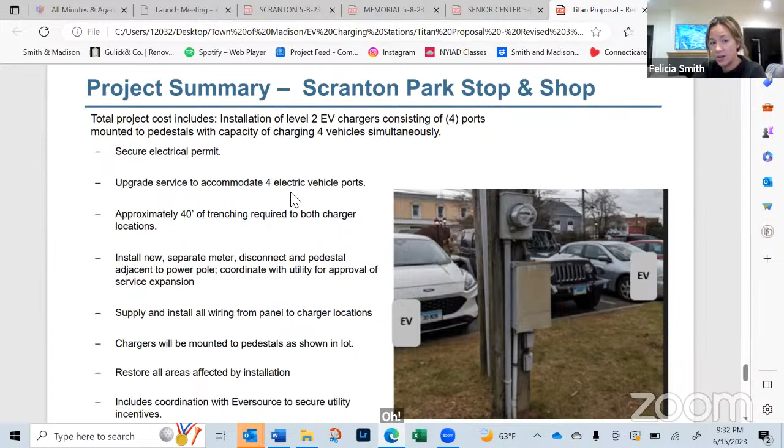Memorial Town Hall. Okay, so the Scranton Park Stop and Shop, fairly straightforward. This location is directly across from the plaza that leads into Ashley's Ice Cream and the Madison Coffee Shop in that area. So there will be 2 ports here for a total of 4 electric vehicle charging stations.

And it will be on pedestals, much like the ones I showed you at the top. They will be on pedestals directly into the ground. We will restore all the areas affected by the installation.

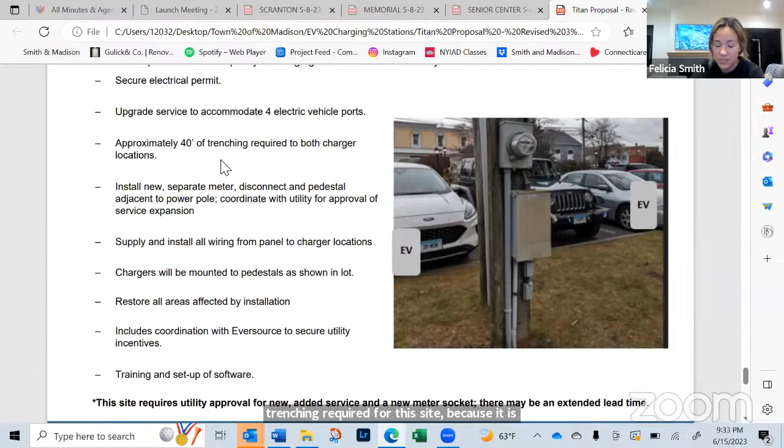Really, it's just as simple as putting a post into the ground. There's very little soil disturbance or trenching required for this site because it is directly next to the current supply. 40 feet of trenching to the location, but it will be within this grassy strip.

And then it's just restriping and repainting the parking spot areas. Eversource will secure the utility incentives and the restoration, and Titan will handle all the software, training, and setup for it. Here you go, so this is the location.

So if you look, this is sort of that plaza with the area for eating and all that. So it's just these locations here. And again, because of providing the ADA compliance, it will go from however many spaces to 1 less to give that access. So I think that's it for that location.

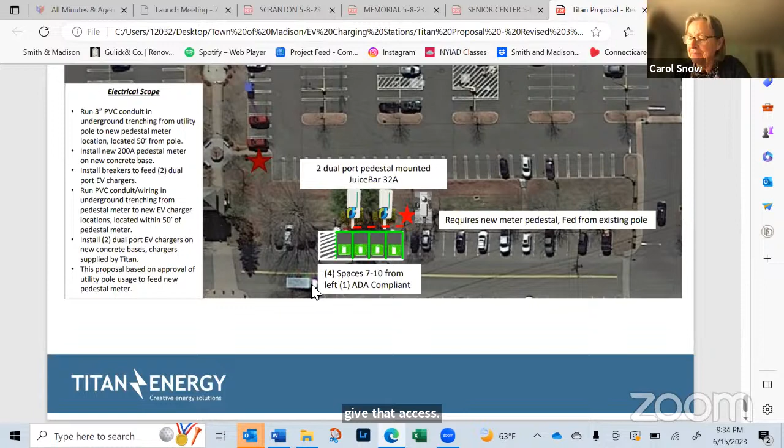There's an additional site plan as well that was provided by John Matthews. You want me to pull that up? Do you have it? Oh yeah, I have it right here. Let me just shrink it so that you can see. There you go.

So this is the gazebo area. This is the proposal. Any questions or comments from the commission?

Yeah, you said there were level 2 chargers. Is that like only 40 kilowatts, or is it closer to 100 kilowatts? There are 2 chargers per port. I don't know exactly what level they are, but they'll be able to provide enough power to fully charge an electric vehicle.

Level 2 can go up to 50 amps. Say it again, Robert. Level 2 can go up to 50 amps, and if they're cranked up to that, they can get you like 40 miles in an hour of charge. So they're not the superchargers, right? Yeah, they're not the superchargers.

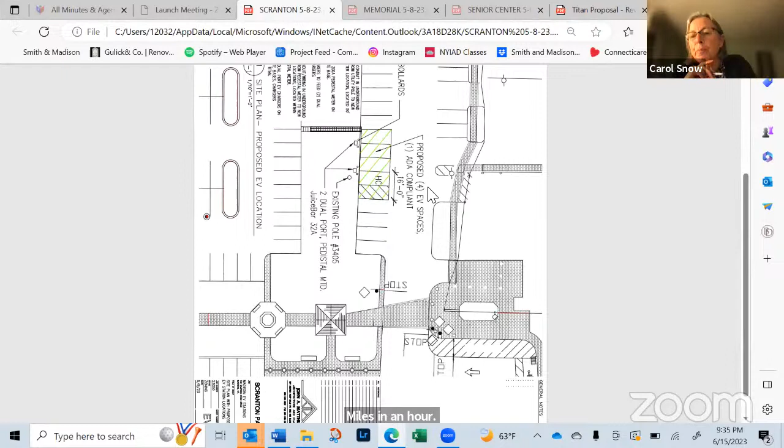Okay, do you know what kind of chargers they are? Are these CCS chargers, NACS chargers? Let me see if I can pull that up. I do know that they are not specific to Tesla, so the Tesla cars will need their converter, but they should be fairly straightforward for all other makes and models of vehicles. Let me see. Yeah, there's adapters for that. Yes, so level 2, 32 amp.

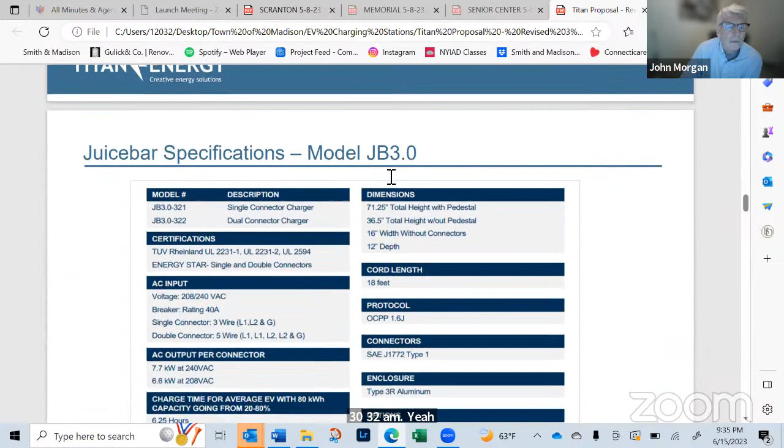The J1772, that's what it is. Okay, yeah, you can get an adapter for that.

And the company providing this for the town will be Titan Energy, and they will hold the contract for the software and maintain the machines on behalf of the town of Madison, and process all of the payments and Eversource incentives on behalf of the town of Madison. And Juice Bar will be the actual software and physical port.

So how will you be charged for it? I mean, I assume you use a credit card or something like that to pay for it, but can you leave your car there for 6 hours to get fully charged?

Yes, and there's also an app if you choose to do it like that, or you can put in your credit card like you would for a parking meter. You plug it in and you can leave while it's charging.

So do we have any option on what type of chargers they provide us, or is this the only thing they provide? Yes, there were three options. The town did select Juice Bar out of those options.

Of the type of charger or? The company that provides the charger and the software, the proprietary software.

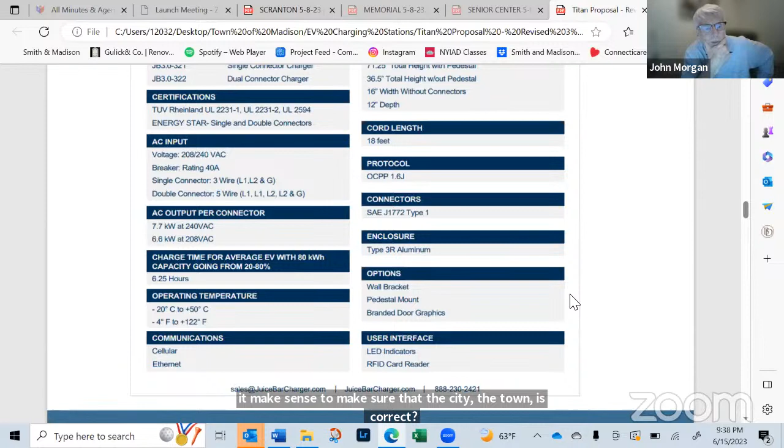Does it make sense to make sure that the town is kind of future-proofed? It turns out it doesn't matter, because for the type of connectors you can get adapters that come with your vehicle when you purchase it. So even if the town only does the SAE J1772 ports, you can get an adapter that'll work with your car and that particular port type.

And actually, I'd hope that we could keep adding more and more. Sure, absolutely. The original proposal for this, we did select 12 locations around town. This is being slowly rolled out with the hope that these are very successful and that there's more demand created, and that these are being used fairly frequently, in which case they would be a profit to the town.

In which case there would be no reason not to continue adding on town property. Right now this is all town property selections. There's no private properties that we've selected, for that ease of being able to control all of that, the land around it.

This is really before you today as a site plan modification, as the park is town-owned property, and modifications to the existing parking lot require site plan approval.

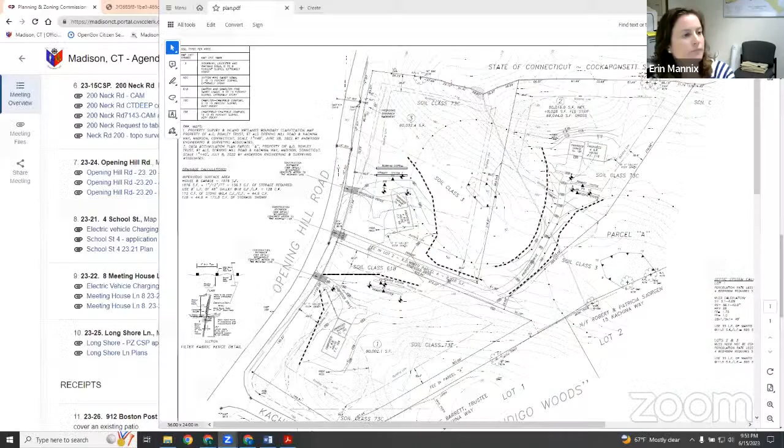Sorry, I have too many files open here. Just need to zoom in. There you go. Can you see that? I mean, this is at least - yes, that's fine, further.

So this shows the schematic development of the properties. Of course, when people who buy the lots come in, lots 2 and 3 to the north there have to go back before the Wetlands Commission for regulated activities for final plans. But this is what we showed as our best case scenario of how to develop the lots with the houses and septic systems fully outside of their 100-foot review.

We have a little bit of grading on lot 3 to the rear of the house towards that potential vernal pool. The driveway to lot 2 kind of skirts up between the 100-foot wetland review areas, with grading for that driveway about 10 feet into the review areas. That wetland to the southeast of the property located on parcel A is not a vernal pool - that is a wetlands that drains to the southeast through the Indigo Woods subdivision. Lot 1 is fully outside of the 100-foot review - that one will not have to go back before the commission.

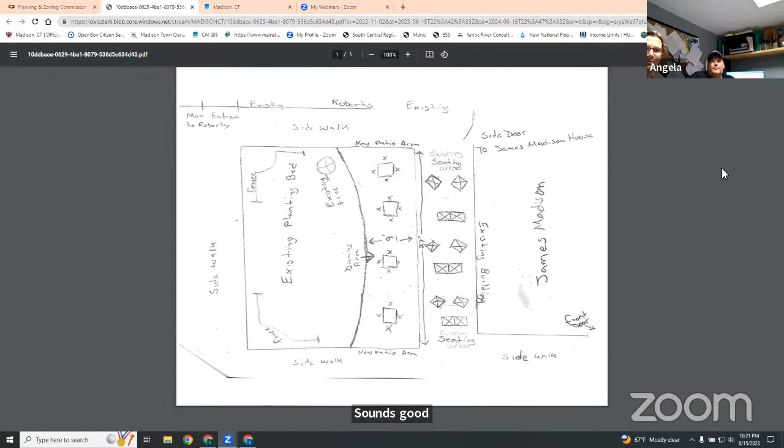So what we're proposing is we have existing sidewalk/patio already in place where it says existing seating. Just to the left of that, we are looking to add an additional 4 sets of tables and chairs to gain a little more business for the restaurant, and also entertain the outside seating aspect for people to be able to sit outside. That's all we're really looking to do.

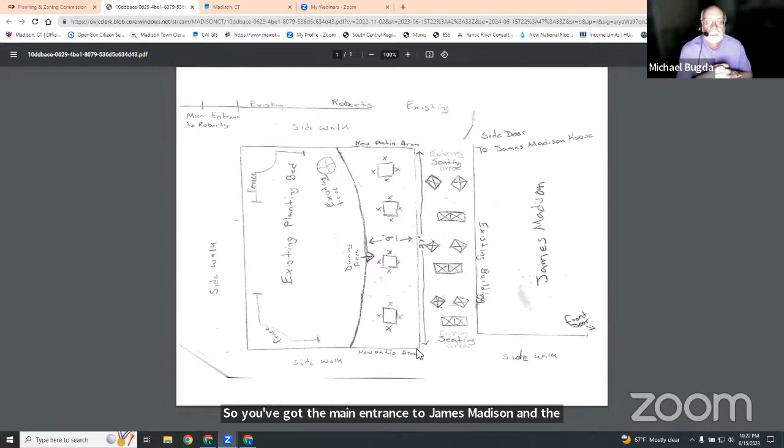And just to orientate everybody, here we've got the parking lot out this way. This is the walkway into Roberts here and the sidewalk. So you've got the main entrance to James Madison and the side entrance here. This is the existing landscaped bed, and this area has been replaced with paver area.

So Angela and they went to ACA this week, and ACA didn't really have any comments really. Understand that there's string patio lighting associated with the dining, and that there's a need for accessibility for the sidewalk, to maintain sidewalk access around the dining, and that your maximum number of seats need to comply with the health code. And it does; from a zoning perspective, the number of seats complies for parking requirements.

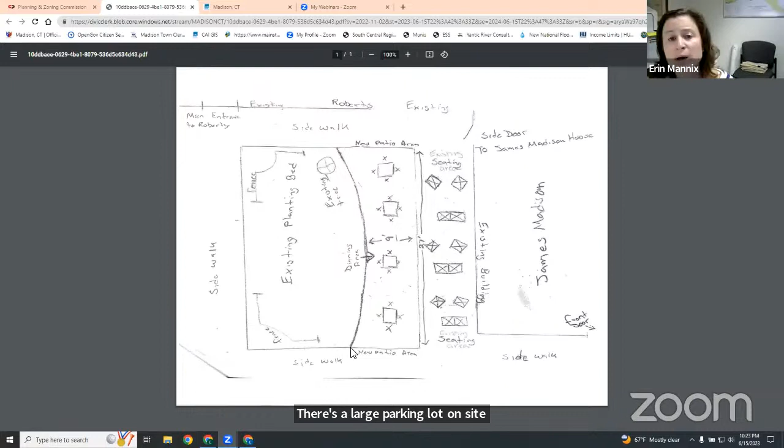Open at 12 o'clock every day, and then the kitchen closes at 9 during the week and 10 o'clock on the weekends. Nice.

Any other questions or comments? The only comment I had aside from commissioners is that there is a requirement for health department approval. I know you've had preliminary meetings with the health department, but there is a need for a formal B100A application, I believe, to the health department. So that's something that you'll have to complete prior to.

I thought Trent said that we did not have to put any more applications in, because I did that initially. I just have to do the patio extension. That may be, yes, double check, I think it may be a communication issue. Okay, because I did the B100A initially, and Amanda, as sanitarian, being in... So just make sure you're buttoned up with the health department.